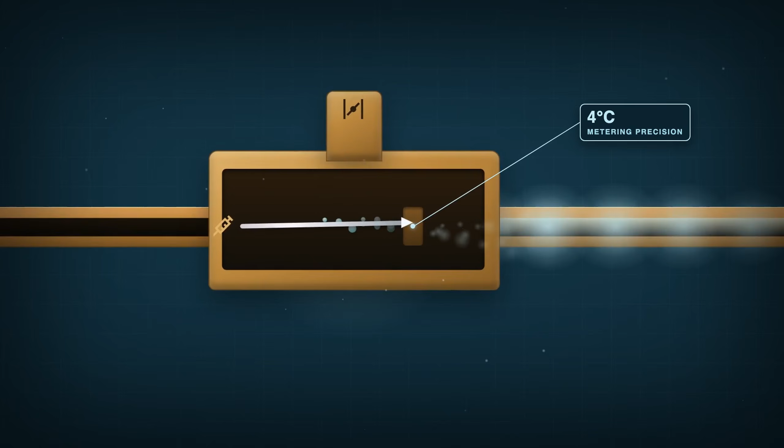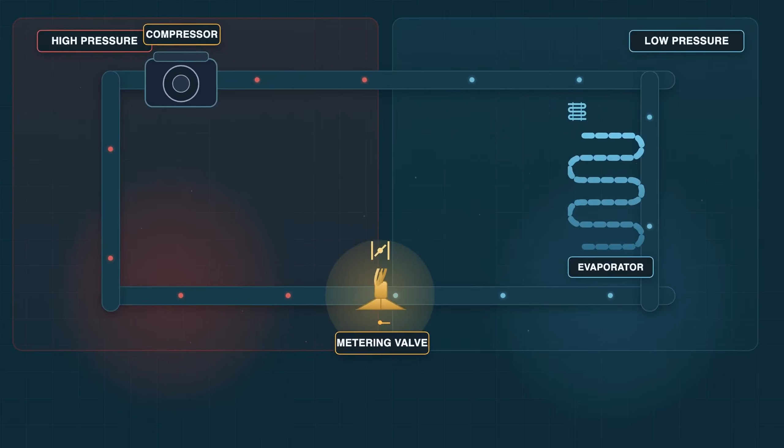Here's the problem this valve solves. Feed the evaporator too much refrigerant and liquid slugs back into the compressor, which can wreck it. Feed it too little and the coil starves, so cooling dies. Refrigerant has to be metered precisely. This valve is the gatekeeper between the high-pressure and low-pressure sides of the loop. Get this one handoff wrong and the whole refrigeration cycle fails.

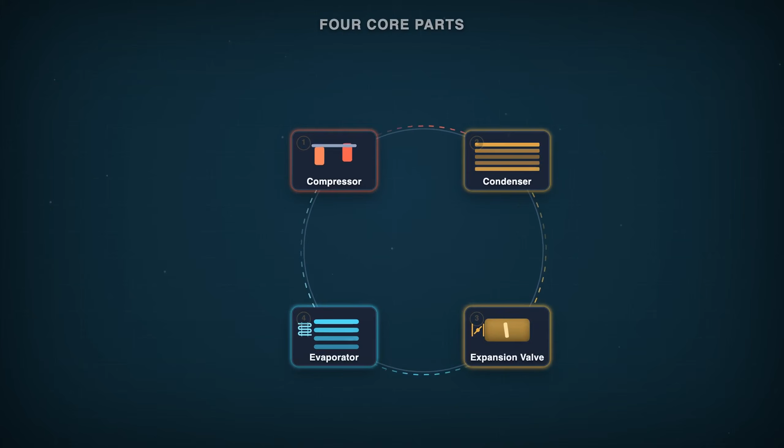Start with where this valve lives. A refrigeration loop has 4 core parts, and they pass refrigerant around in a circle. First, the compressor squeezes cold gas into hot, high-pressure gas. Second, the condenser out back dumps that heat to the air, and the refrigerant cools into a warm, high-pressure liquid. Third comes our star, the expansion valve. Fourth, the evaporator, the cold coil inside, where the refrigerant boils and soaks up heat from your room or your food. Then the gas returns to the compressor and it all starts again.

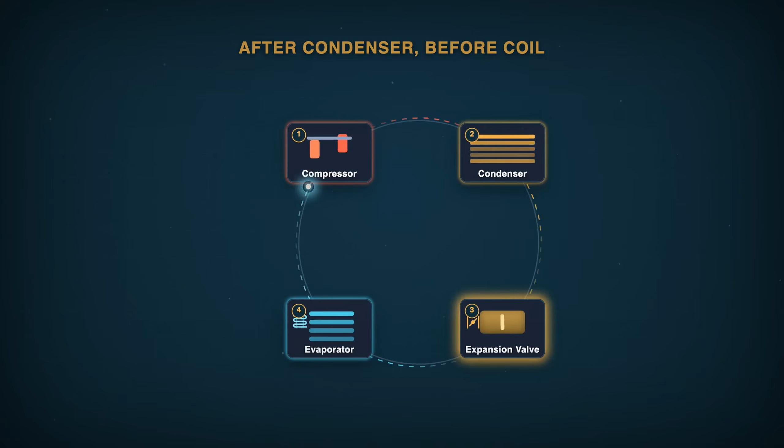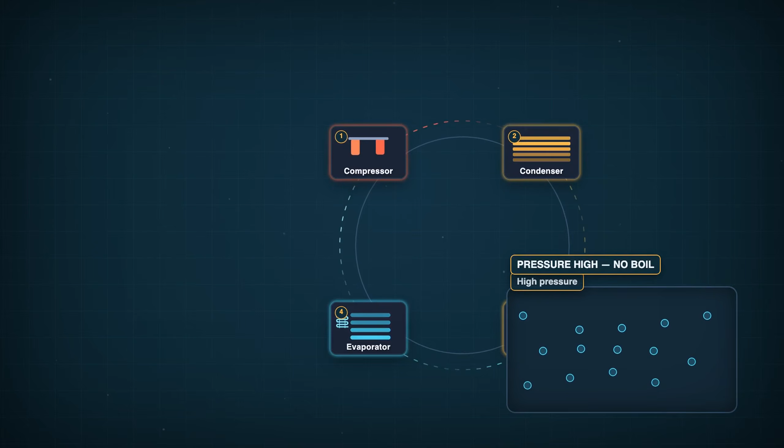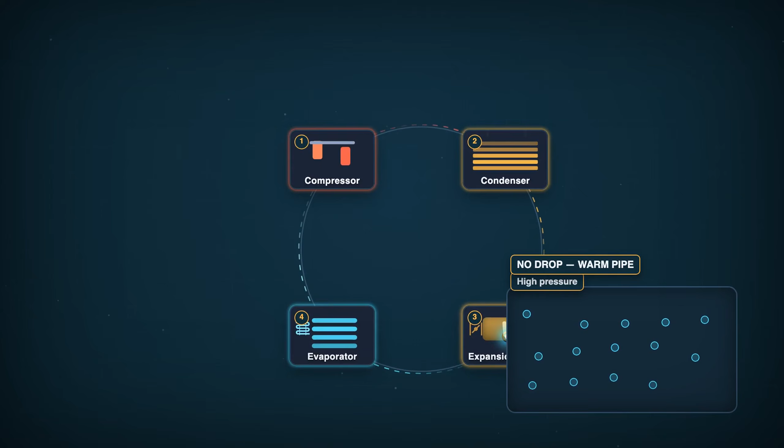So the valve sits after the condenser and before the evaporator. Its job sounds almost too simple. It drops that high-pressure liquid down to low pressure. Why does dropping the pressure matter? Because a liquid that is under high pressure will not boil. Lower the pressure and its boiling point crashes, so it can flash into cold vapor and absorb heat. Without that pressure drop, the evaporator is just a warm pipe doing nothing. The valve is the exact spot in the circle where hot and squeezed becomes cold and ready.

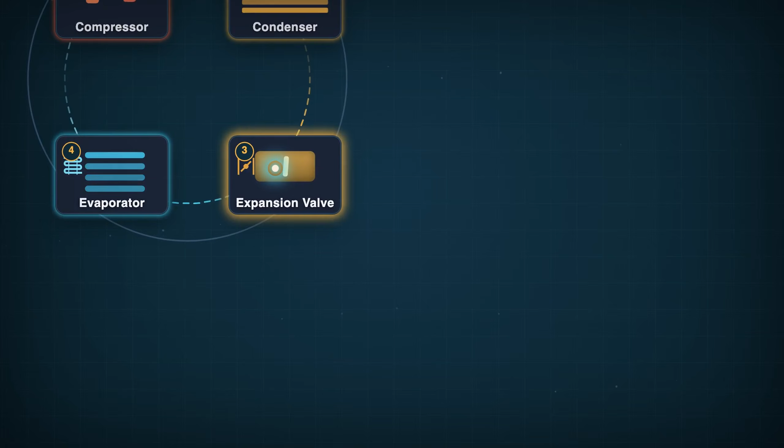4 parts, 1 loop. But dropping the pressure is easy. Doing it by the exact right amount, moment to moment, is the hard part. That is where the needle comes in.

Now zoom in on the drop itself. High-pressure liquid refrigerant arrives, warm and packed tight. It reaches a tiny opening, a sharp needle sitting in a matching seat, leaving only a hair-thin gap. Picture a valve on a garden hose, but shrunk down to the width of a pin. The liquid squeezes through that gap under real pressure. On the far side, the pressure suddenly crashes.

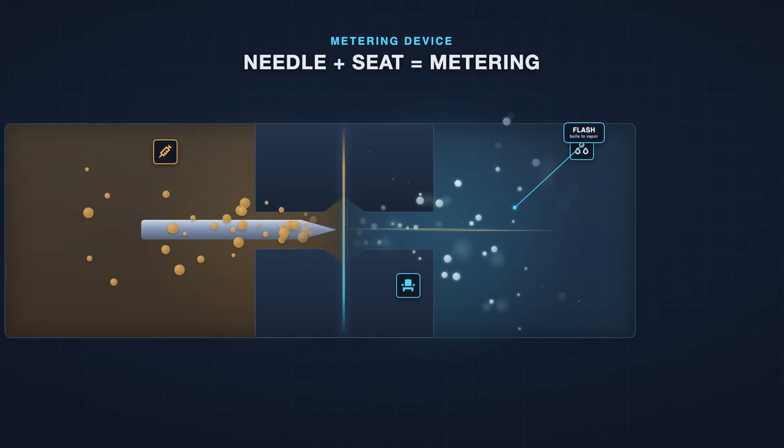And here's the payoff of that crash. The moment the pressure drops, the refrigerant can't stay liquid. It flashes, meaning part of it boils instantly into vapor, and that flash chills the whole mix hard. What comes out the other side is a cold, low-pressure blend of liquid and gas, exactly what the evaporator needs to pull heat out of your air.

So the needle is doing 2 jobs at once. It holds back the high pressure on one side, and it releases a controlled trickle to the low-pressure side. How much trickles through depends on one thing: how far the needle lifts off its seat. Lift it a little, a thin stream flows. Lift it more, the gap widens and more refrigerant pours through. That adjustable gap and nothing more is what the word metering means here. Not on or off, a dial.

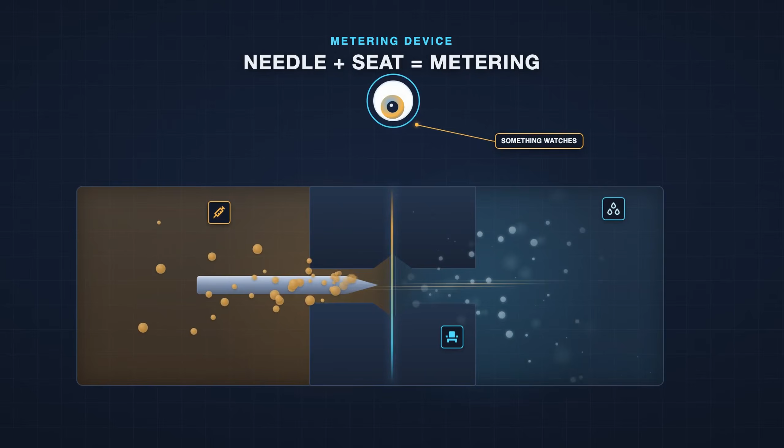But a needle can't decide on its own how far to open. Something has to tell it. Something has to be watching. Here's the part that makes this valve clever. Something is watching, and it isn't a sensor with wires.

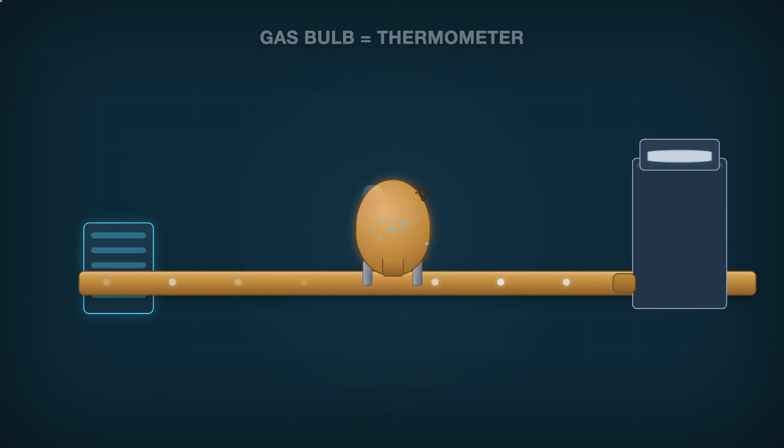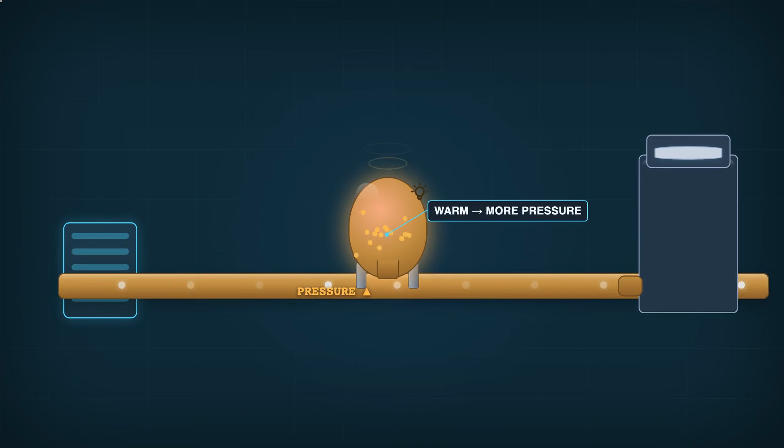Follow the pipe past the evaporator to where the refrigerant leaves the cold coil on its way back to the compressor. Clamped tightly onto that outlet pipe is a small sealed bulb filled with its own charge of gas. This little bulb is the valve's thermometer. It feels the temperature of the refrigerant leaving the coil, but it doesn't feel it with electronics. It feels it with pressure. When the pipe is warm, the gas sealed inside the bulb warms up too, and warm gas pushes harder, so the pressure inside rises. When the pipe is cold, the gas cools and the pressure inside falls. Temperature becomes pressure with no battery involved.

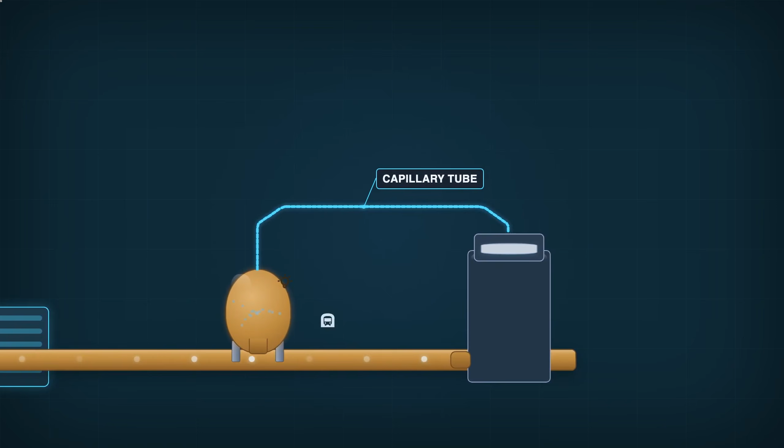Now that pressure has to travel somewhere useful. Running from the bulb is a thin tube, about as narrow as a coffee stirrer, called a capillary tube. It carries the bulb's pressure all the way back to the top of the valve. And there it presses on a thin, flexible metal disc, a diaphragm sitting right above the needle.

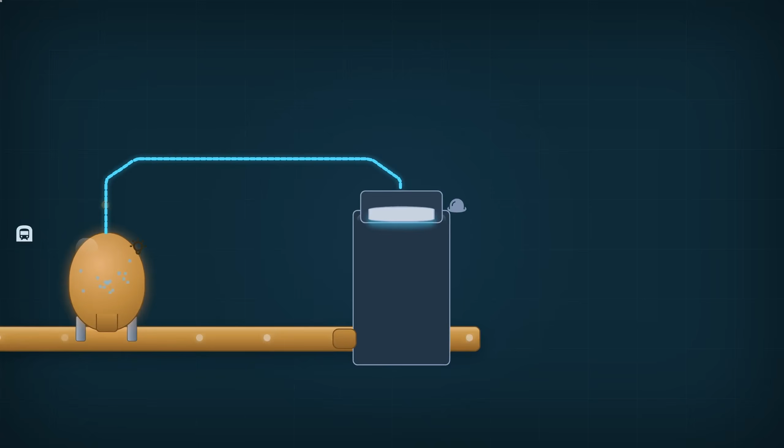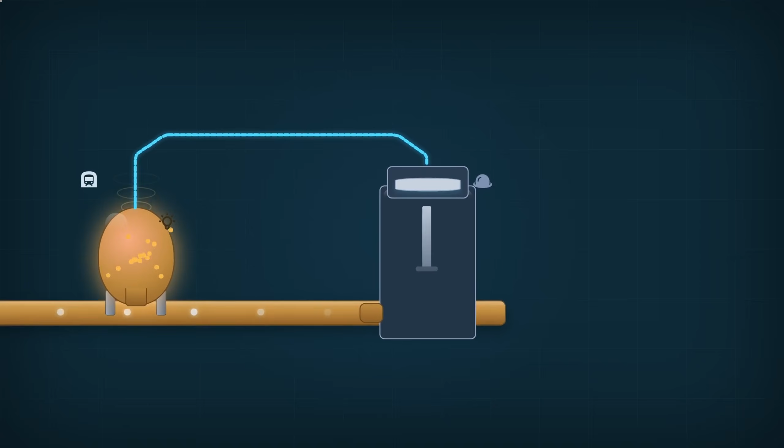So trace the chain. Temperature at the outlet sets the bulb's gas pressure. The tube pipes that pressure to the diaphragm on top of the valve. The diaphragm sits directly over the needle we just met. The eyes are wired to the hand. But which way does it push? Now watch the loop close itself all by itself.

Say the refrigerant leaving the coil runs warm. That warmth heats the bulb, the gas inside expands, and its pressure climbs. That higher pressure pushes the diaphragm down. The diaphragm shoves the needle down with it, opening the gap wider. A wider gap means more refrigerant flows into the evaporator. More refrigerant means more cooling, which pulls the outlet temperature back down.

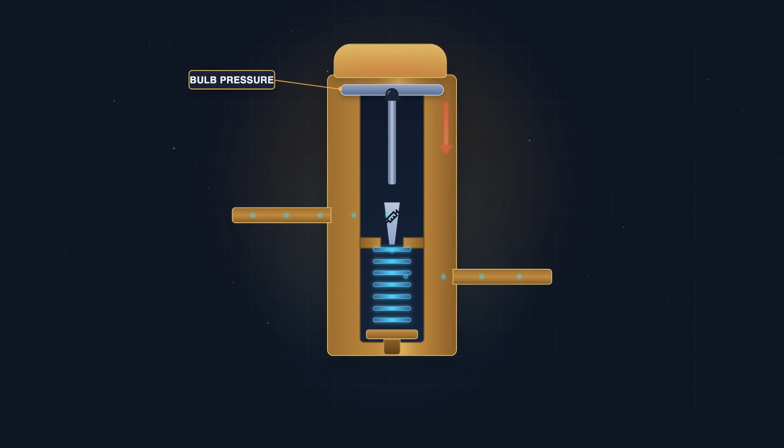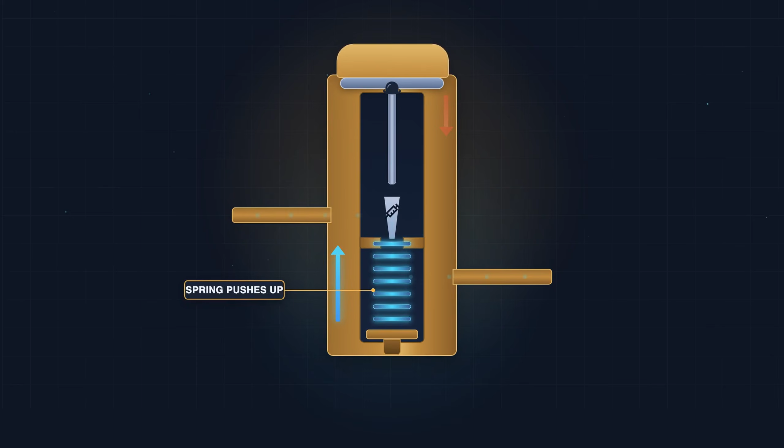Now run it the other way. Say the outlet runs cold. The bulb's gas contracts, its pressure drops, and the push on the diaphragm eases off. But something has to close the needle back up. Underneath the needle sits a spring, and that spring is always pushing up, trying to shut the gap. When the bulb's pressure fades, the spring wins, the needle rises toward its seat and less refrigerant flows. Less flow lets the coil warm back up.

So it's a tug of war. Bulb pressure from above pushing the needle open. Spring from below pushing it closed. The needle settles wherever those two forces balance. And that spring is calibrated, meaning a technician can tighten or loosen it to set the target the valve aims for. Push harder, aim for a warmer outlet. Ease off, aim for a colder one.

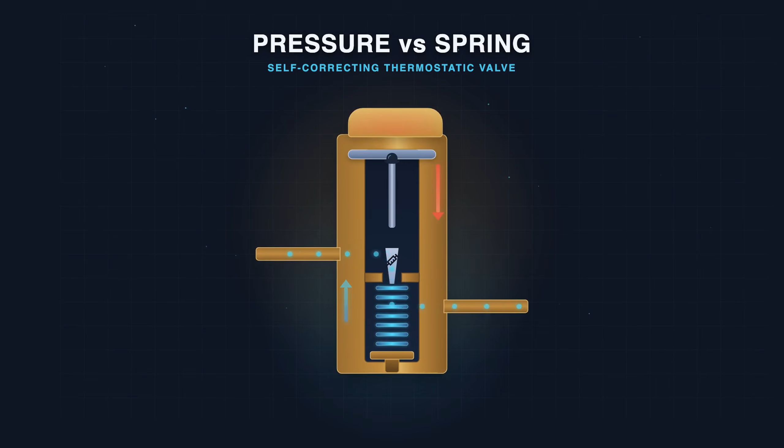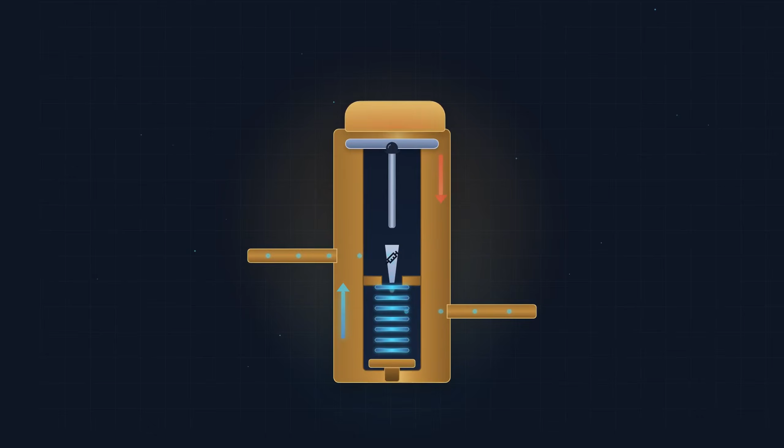Here's the beautiful part. No chip, no circuit board, no code. Just gas pressure versus a spring, correcting itself thousands of times an hour. But correcting toward what exactly? So what target is this whole tug of war chasing? One thing, and it has a name: superheat.

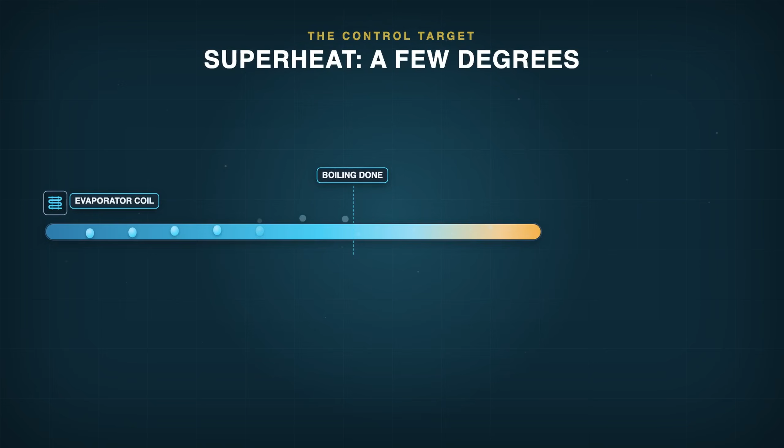Here's the idea before the word. Inside the evaporator, liquid refrigerant boils into gas as it absorbs heat. The valve's goal is to make sure the refrigerant finishes boiling a little before it reaches the end of the coil. Then in that last stretch, the gas keeps warming past its boiling point by a few degrees. Those extra degrees above the boiling point are called superheat.

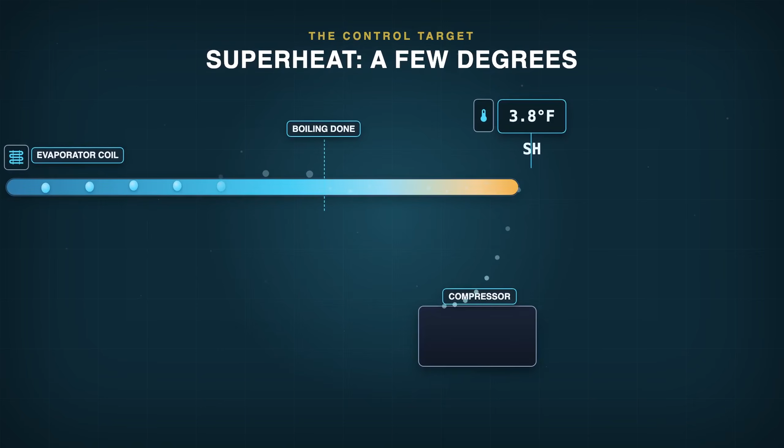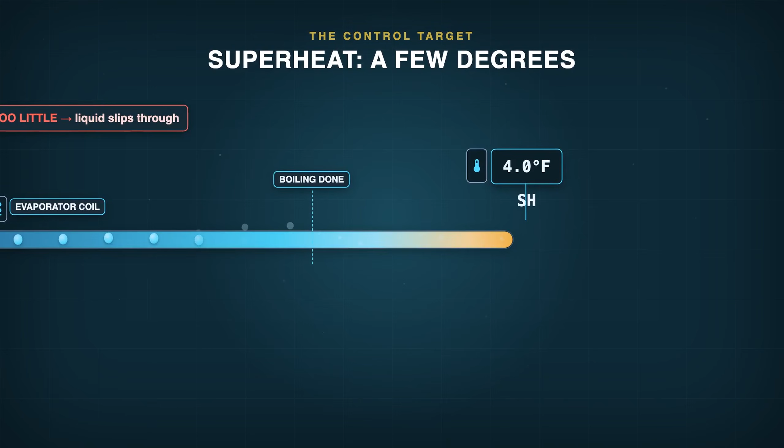Why fuss over a few degrees? Because those degrees are your proof. If the refrigerant is superheated, it is 100% gas. Not a drop of liquid is left. And that guarantee is everything, because remember what we said at the start. Liquid slugging back into the compressor can destroy it. Superheat is the safety margin that keeps the compressor drinking only dry gas, never liquid.

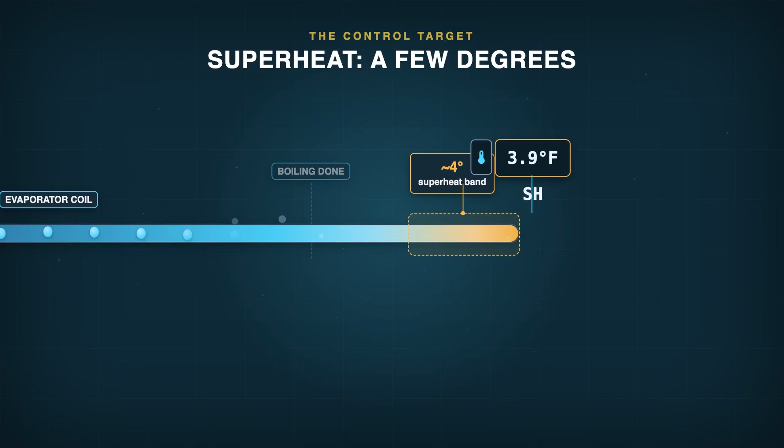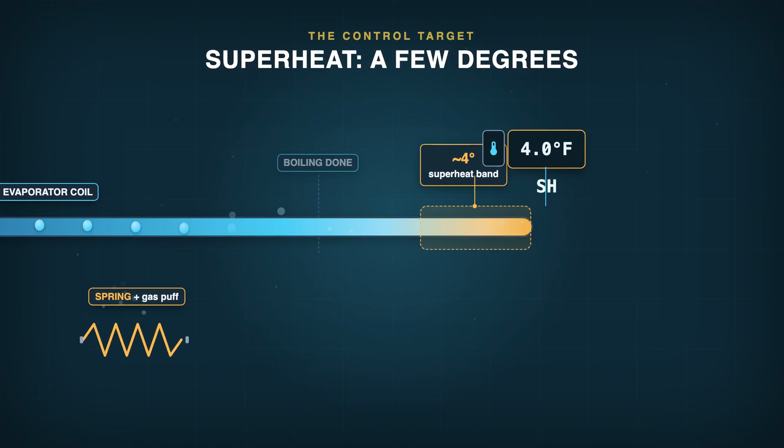Too little superheat risks liquid getting through. Too much means you left cooling capacity unused on the table. So the valve threads the needle, literally holding superheat in a tight band. In a well-set system, that band is often held within roughly 4 degrees. That is the 4 degrees in the title. Not a marketing number, a control target. A few stubborn degrees defended by a spring and a puff of gas.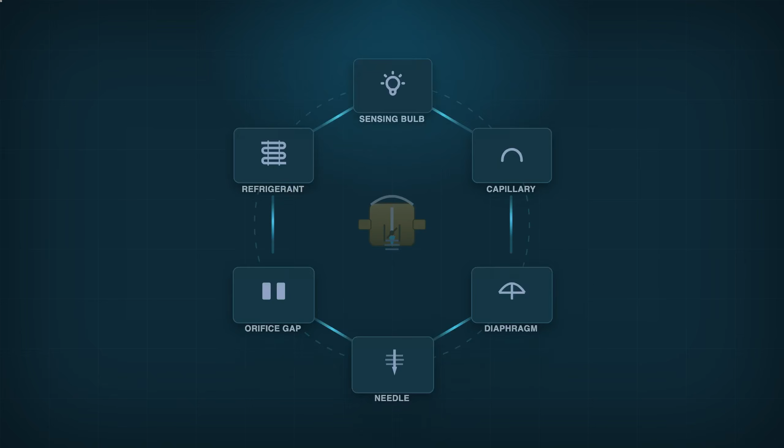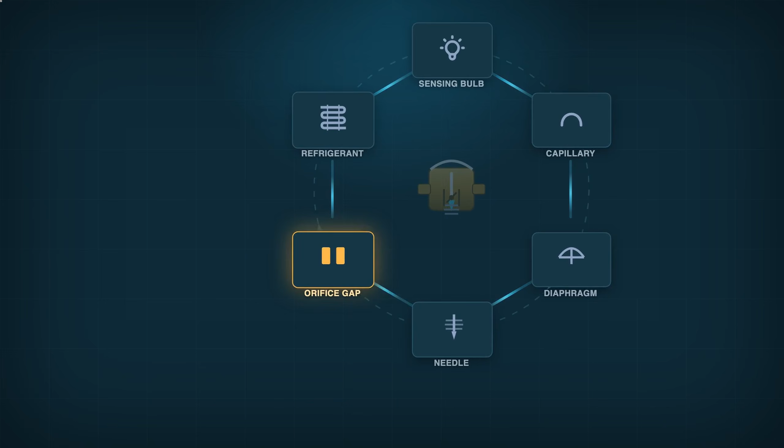Now step back and watch the whole thing move as one machine. Refrigerant leaves the coil. The bulb feels its temperature and turns it into gas pressure. That pressure runs up the thin tube and presses the diaphragm. The diaphragm pushes the needle against the spring. The needle sets the gap. The gap sets the flow. The flow changes the temperature the bulb feels next. And around it goes, a closed circle correcting itself without pause.

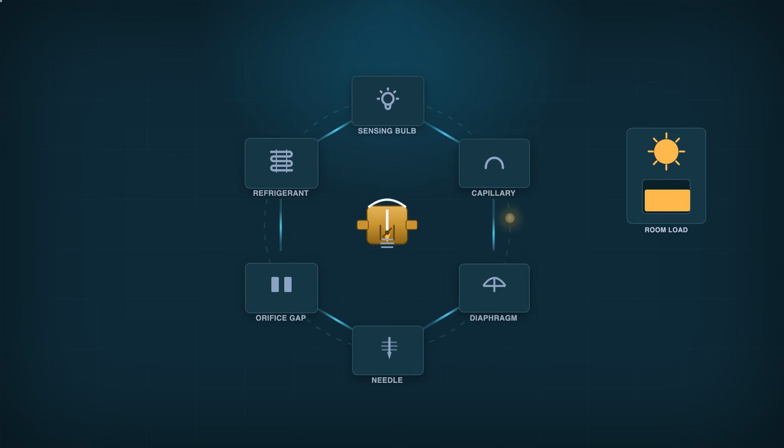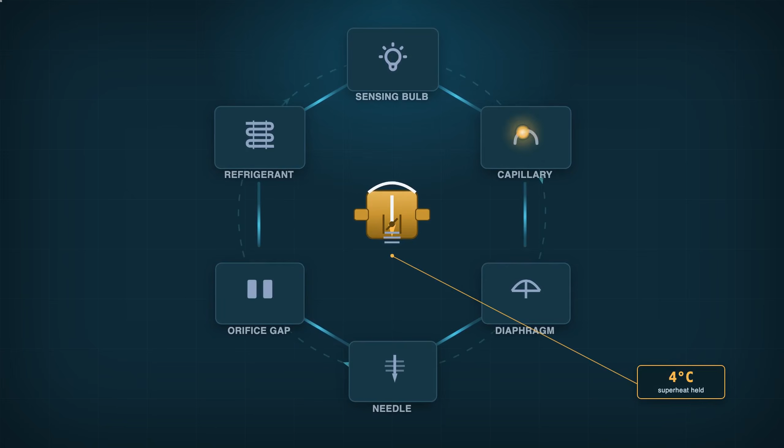When your room heats up on a hot afternoon and the coil runs warm, the valve opens a hair and pours in more refrigerant. When the load eases, it throttles back. This constant self-correction is the real reason your AC and your fridge stay reliably cold, while the demand on them swings all day long. A purely mechanical brass valve, flexing a needle to hold superheat within about 4 degrees. No sensors, no chips. Just gas pressure versus a spring, settling the argument 1,000 times an hour. That is the whole trick.

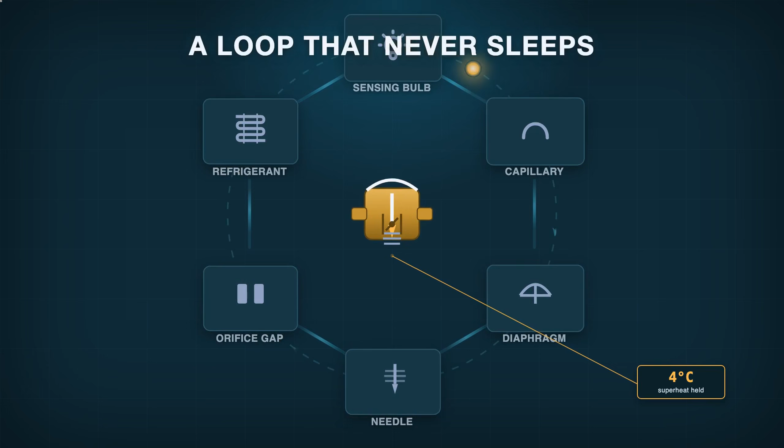The gatekeeper never sleeps. So here's what to take from this. If your AC or fridge stops getting cold, the failure often isn't the big loud compressor everyone blames. It's this quiet little valve, or the bulb strapped to the pipe losing its charge of gas and going blind. When a tech talks about checking superheat, now you know exactly what they're reading. The few degrees of safety margin that prove only dry gas is heading back to the compressor.

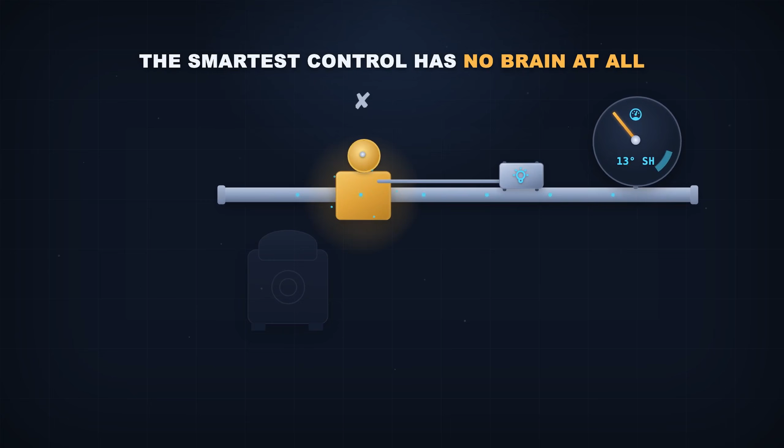One more thing worth carrying: the smartest control in the machine has no brain at all. It's a spring and a puff of gas, outthinking a computer. One big idea to keep: a gas-filled bulb flexing a needle meters refrigerant to within about 4 degrees, no electronics required. That's the gatekeeper. But the valve is only one station in the loop. Next time we open up the compressor itself, the part that squeezes cold gas hot, and show you exactly how it does the squeezing.